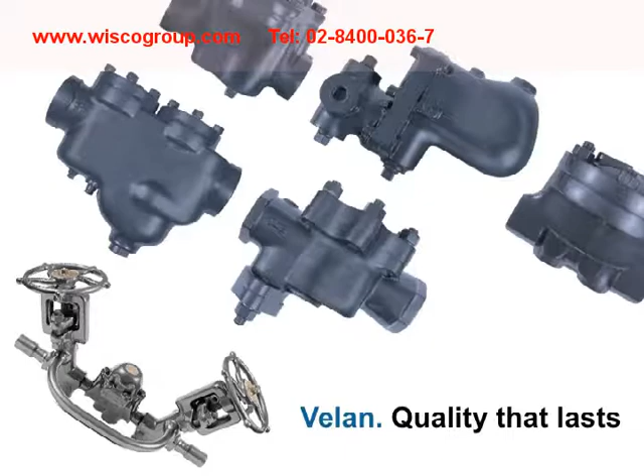Velan is a global manufacturer of industrial valves with over 1,800 employees and 13 manufacturing plants located in 9 countries around the world.

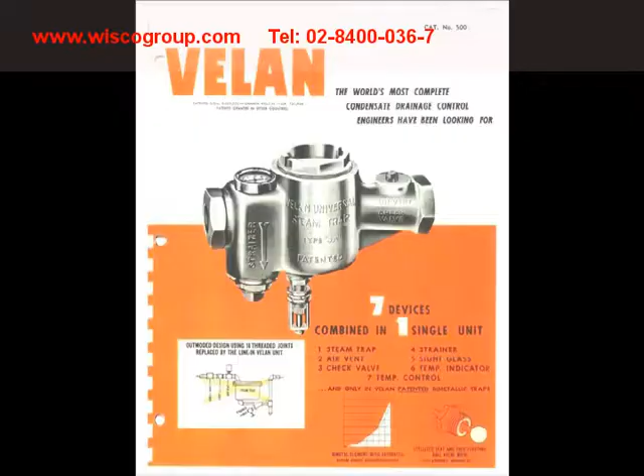The Velan Universal Steam Trap was introduced for the first time in Canada and the United States in January of 1950. In those days, the predominant steam trap technologies in use were cumbersome, inefficient, and required frequent maintenance.

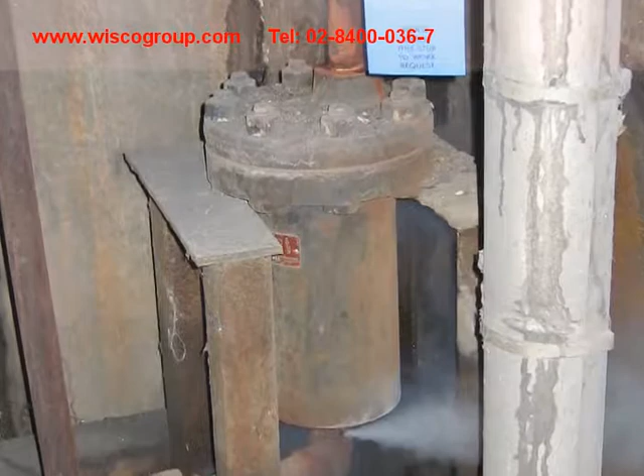Founder and CEO Mr. A.K. Velan set out to design a steam trap that was suitable for the high pressure and high temperature operating conditions

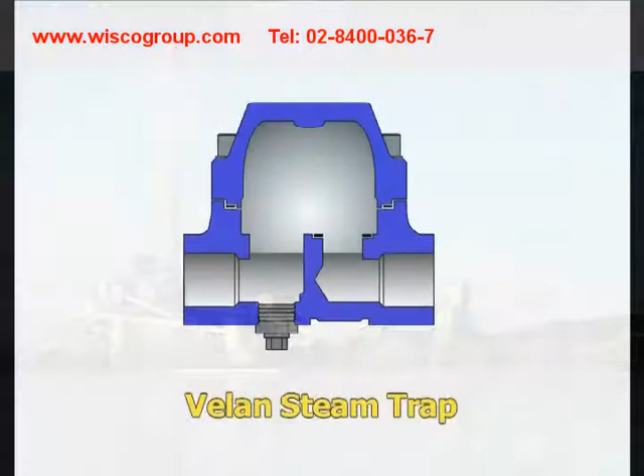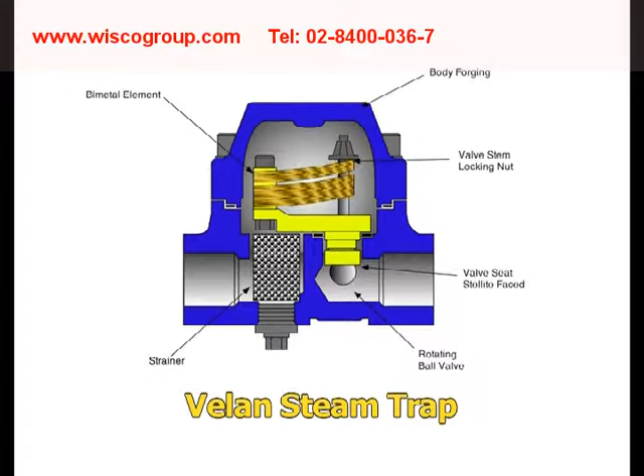that naval vessels and thermal power plants were being designed around at the time. The operation of this new steam trap was based upon the principle of a free-floating and rotating ball valve placed on the downstream side of a stellite valve seat, actuated by a multi-segment bimetallic element. The result is a steam trap that combines effective condensate drainage with high energy efficiency and long service life.

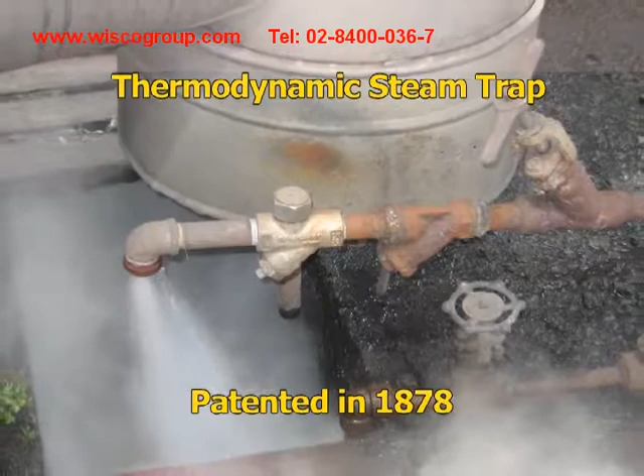The dominant steam trap technologies today are similar to those in use when Mr. Velan set out to change the world of steam traps in 1950. For example, the thermodynamic disc trap is the most popular design used across all industries today.

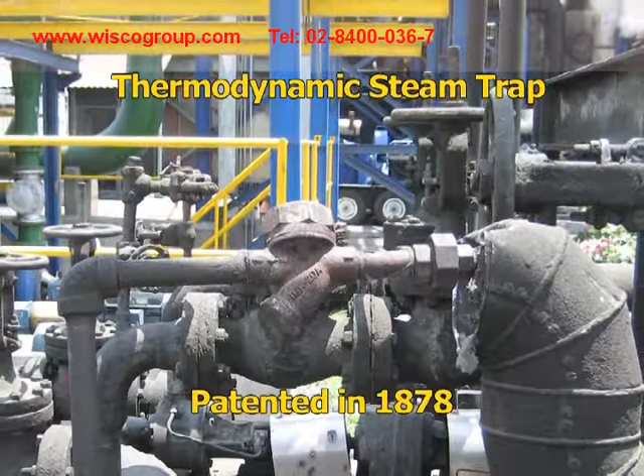First patented in 1878, the thermodynamic disc trap operates on the difference in flow velocity between a liquid and a gas. When liquid is being passed through the trap, the disc is pushed out of the way of the flow path, allowing free discharge of condensate. However, when steam or air enters the trap, the velocity of the flow increases and the disc is pulled toward the seat.

When the steam which is keeping the disc closed condenses, the trap opens and the cycle repeats itself.

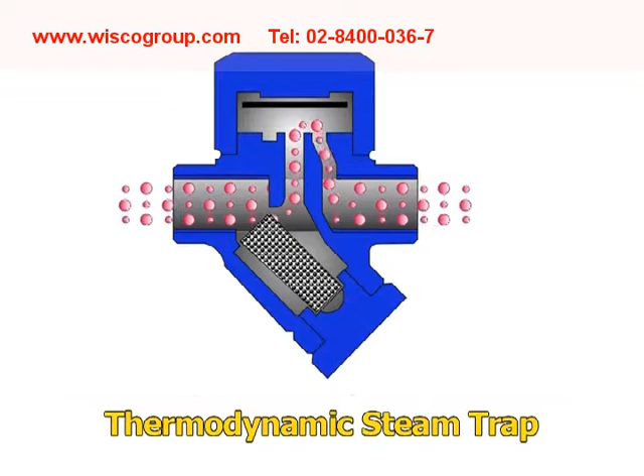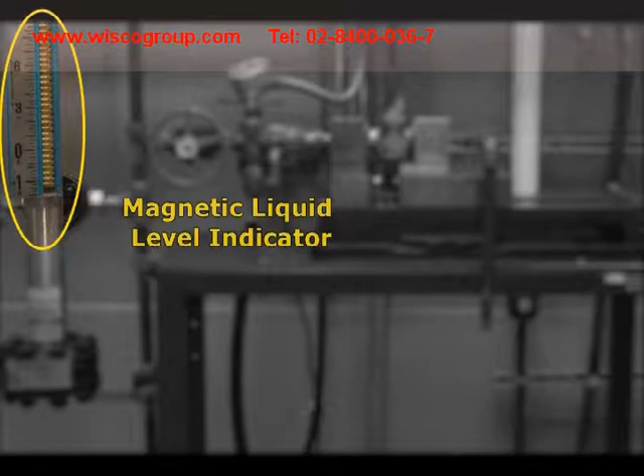For demonstration purposes, we have fitted a thermodynamic steam trap in our test rig to show its discharge characteristics. We have also fitted a magnetic liquid level indicator to show the level of condensate in front of the steam trap. Please note the operation when the condensate is completely purged from the line.

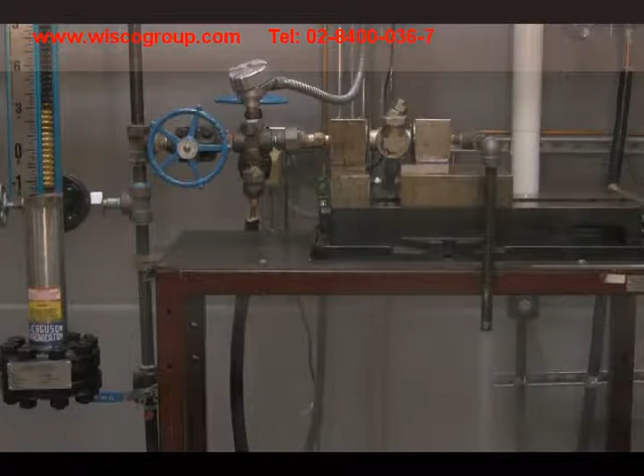The cycling action of the TD trap results in drainage of the condensate in the steam line. However, the violent blast discharge results in large amounts of steam being lost during each cycle, as high velocity steam flow is necessary to end the discharge cycle and close the trap.

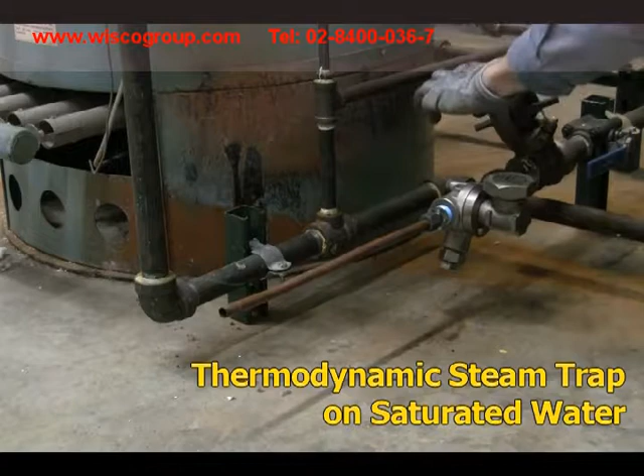Many manufacturers of thermodynamic steam traps claim that flashing condensate is responsible for ending the discharge cycle and closing the trap. However, as this flow test on boiler blowdown demonstrates, the TD trap will not close in the presence of saturated condensate. Only steam flow through the trap will end the discharge cycle and close the trap.

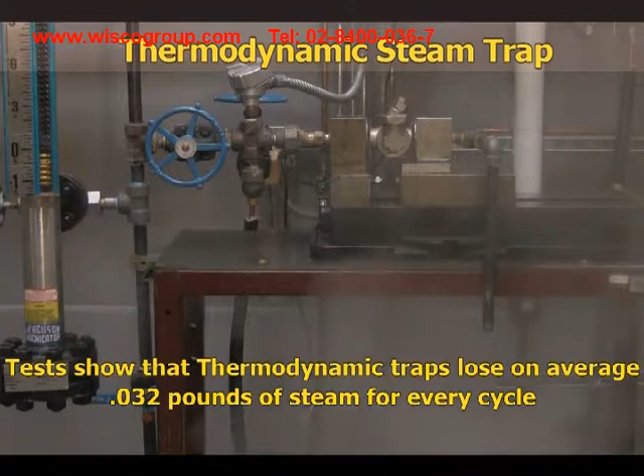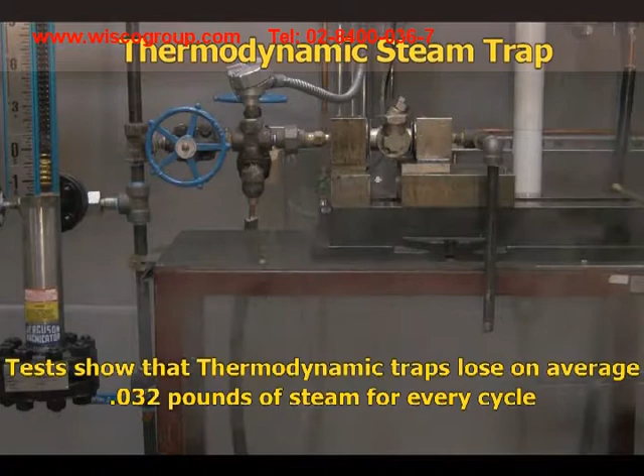Laboratory testing shows not only that steam loss is necessary for the TD trap to operate, but also allows us to measure the amount of steam loss during each cycle of the trap. The average steam loss required for a thermodynamic trap to function is over 0.03 of a pound of steam per cycle.

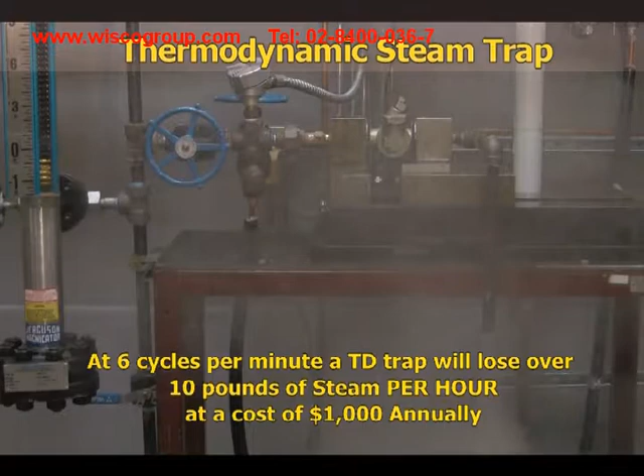At current energy costs and a cycle rate of 6 times per minute, the amount of steam required to operate a fully functional thermodynamic steam trap is in excess of $1,000 per year. The amount of steam loss necessary to operate a population of 1,000 thermodynamic steam traps is in excess of $1 million annually.

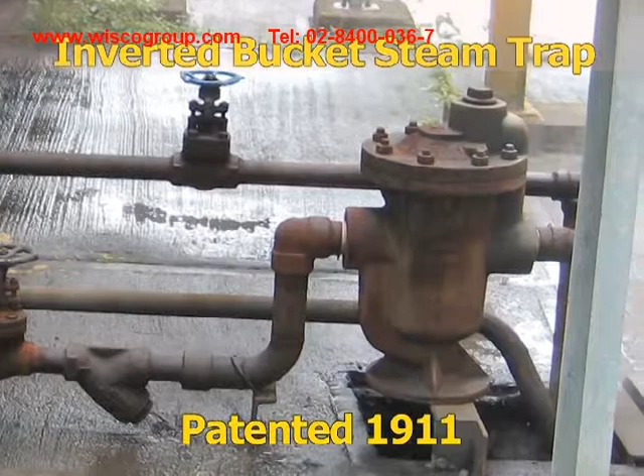The inverted bucket steam trap is widely used across all industries today. First patented in 1911, the inverted bucket trap operates on the difference in density between steam and condensate.

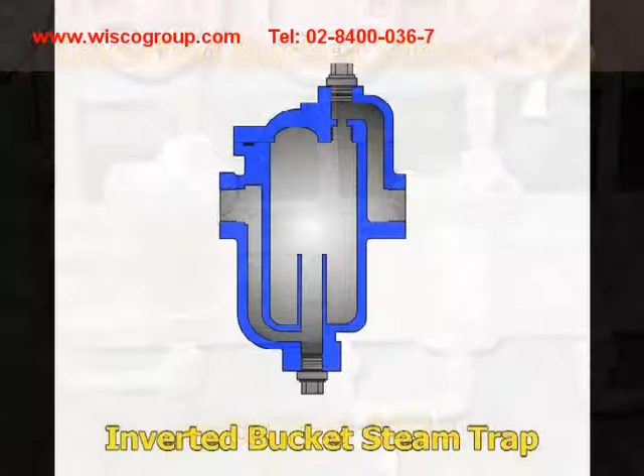This trap uses a bucket, open on the bottom, to operate a lever valve and orifice located in the top of the trap.

In the absence of steam, the bucket sinks to the bottom, keeping the valve in the open position and allowing for free discharge of condensate. When steam or air enters the trap, the bucket becomes buoyant and floats to the top, closing the valve. When this steam condenses, the bucket sinks to the bottom, opening the lever valve and discharging the condensate again.

During normal operation, steam is continually lost through the air vent in the top of the bucket and periodically discharged through the valve as the bucket loses buoyancy.

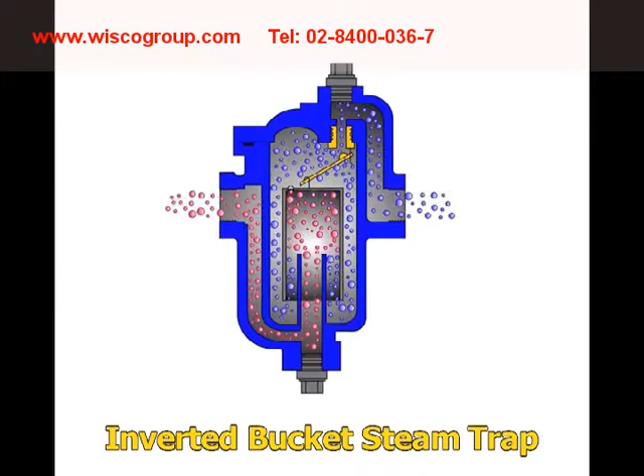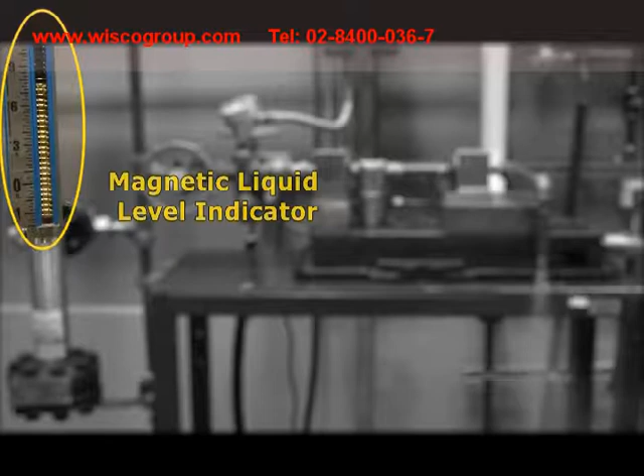For demonstration purposes, we have fitted an inverted bucket steam trap in our test rig to show its discharge characteristics. We have also fitted a magnetic liquid level indicator to show the level of condensate in front of the steam trap. Please note the operation when the condensate is completely purged from the line.

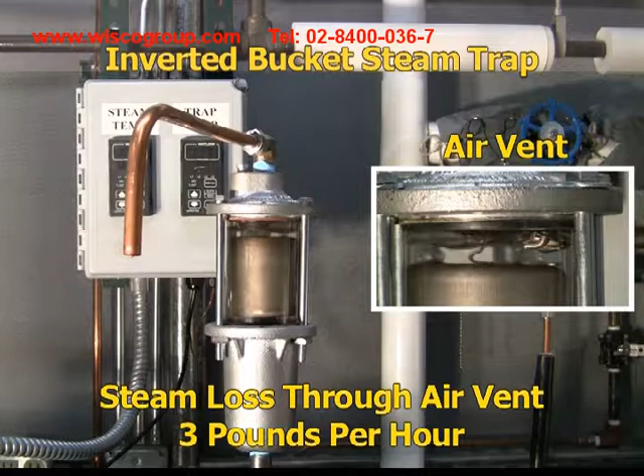Testing shows loss through the air vent to be approximately 3 pounds of steam per hour. This steam loss occurs throughout the entire life of the trap.

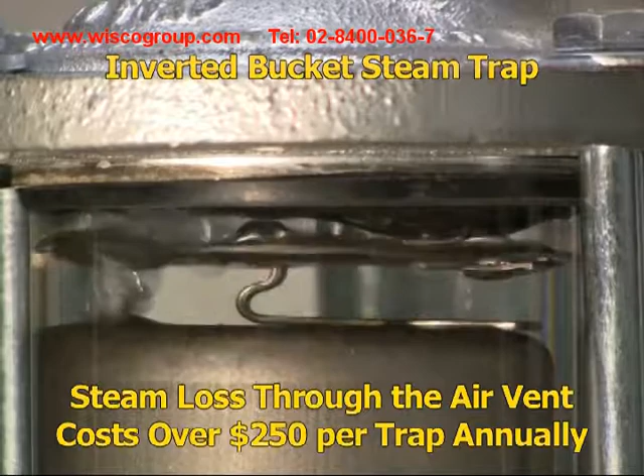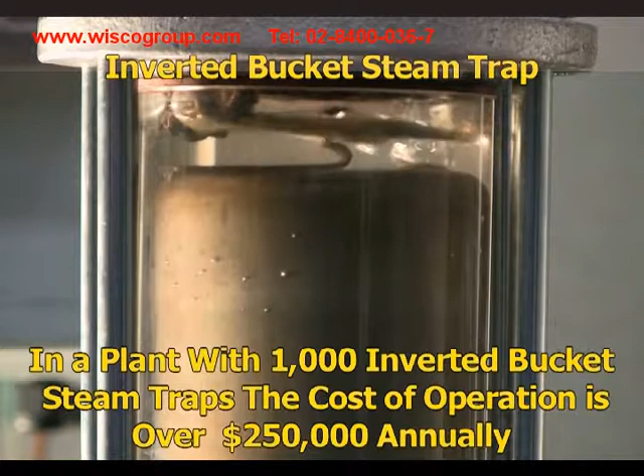At current energy costs, the amount of energy lost due to the operation of the air vent is over $250 per trap annually. In a plant with a population of 1,000 inverted bucket steam traps, the amount of energy lost due to the operation of the air vent is over $250,000 annually.

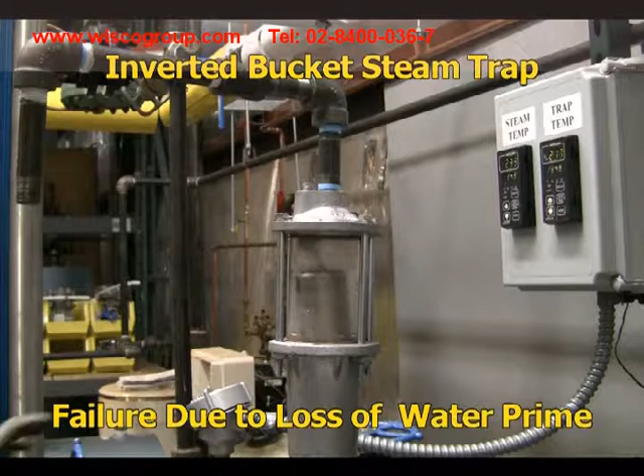The most common cause of failure for an inverted bucket steam trap is loss of water prime. As this demonstration shows, if the water prime is lost from the inside of the trap body, the high velocity flow through the trap prevents it from repriming. Loss of prime can be caused by exposure to superheat, improper sizing, mechanical wear, or simply too rapid a startup.

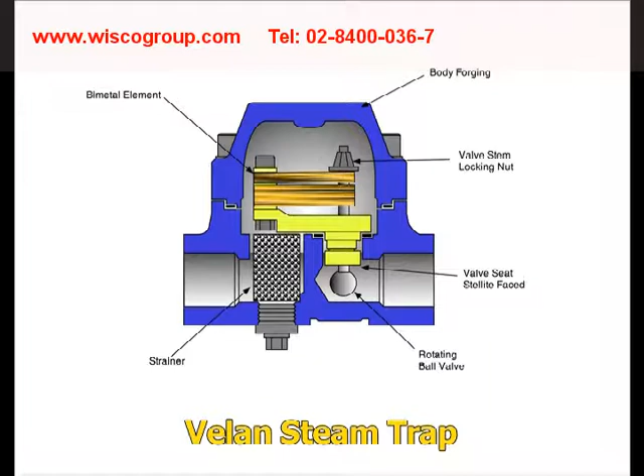The Velan steam trap offers an efficient alternative to conventional steam trap designs. Operating on a thermostatic principle, the Velan steam trap requires no more energy to function than is present in the condensate that collects at the drain point.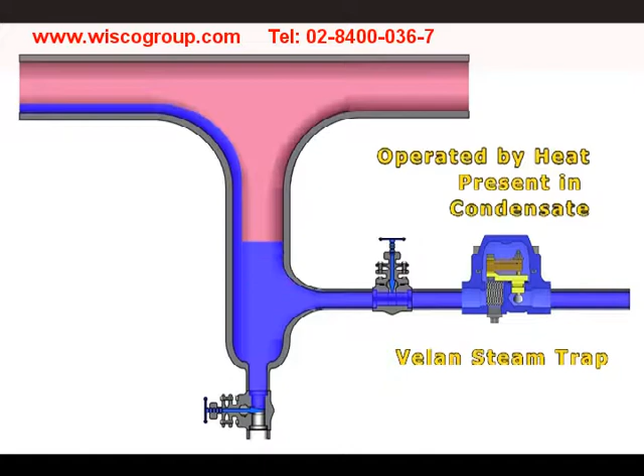At ambient temperatures, the bimetal element is relaxed and the valve is open wide, allowing for rapid discharge of cold condensate and non-condensable gases at startup. As the temperature of the condensate increases, the bimetal element pulls the valve closed.

In the presence of live steam, the valve remains closed tightly. When condensate in the line cools slightly, the line pressure overcomes the closing force of the bimetals, and condensate discharge resumes.

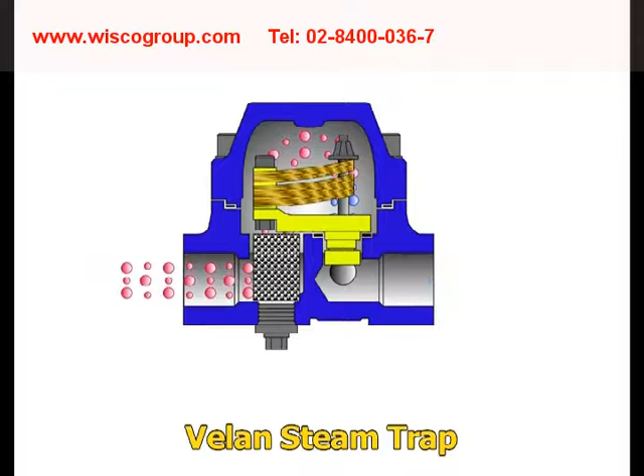In the event of a sudden drop in upstream pressure, the valve and seat arrangement acts as a check valve, preventing reverse flow in the system.

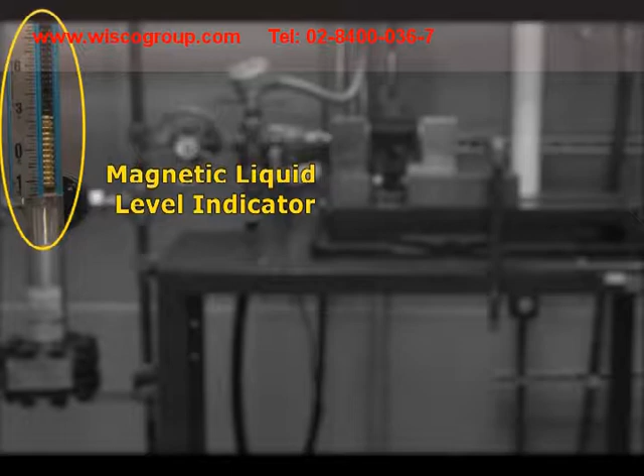For demonstration purposes, we have fitted a Velan thermostatic steam trap in our test rig to show its discharge characteristics. We have also fitted a magnetic liquid level indicator to show the level of condensate in front of the steam trap. Please note the operation when the condensate is completely purged from the line.

The Velan steam trap provides rapid, efficient startup of steam drip leg and tracing systems.

Due to the advanced design of the bimetallic element, the Velan steam trap maintains no more than 18 inches of condensate ahead of the trap at any time, ensuring efficient drainage and preventing the loss of live steam.

Compare the discharge of the Velan steam trap with the thermodynamic disc trap below.

The Velan steam trap will save over $1,000 annually over that of a thermodynamic disc trap. In a plant with a population of 1,000 steam traps, this is a savings of over $1 million annually.

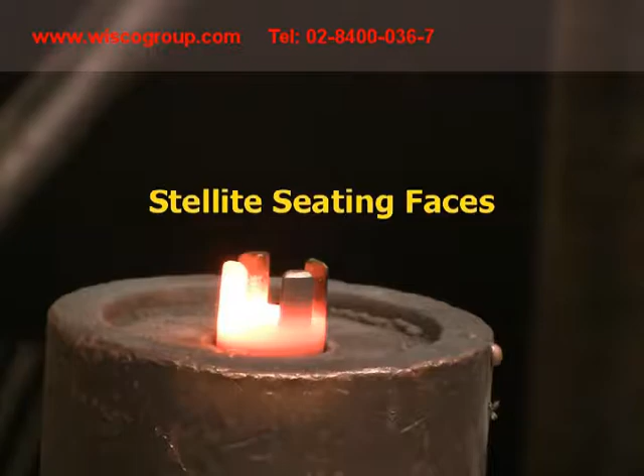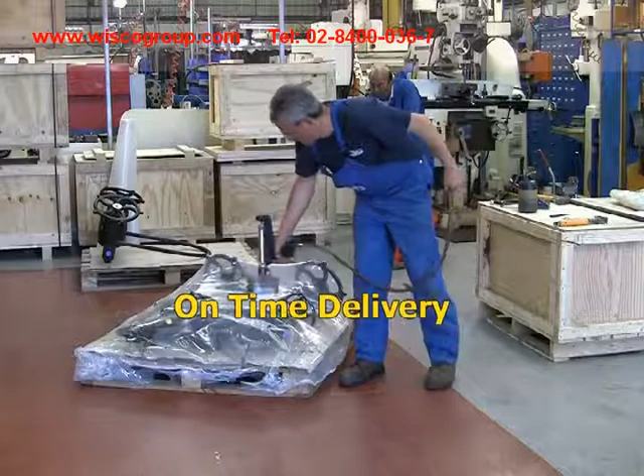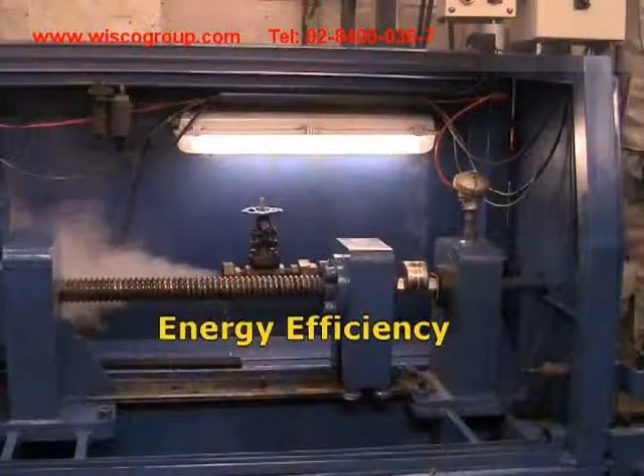Velan steam traps are manufactured in compliance with all major international quality standards, using the most durable materials available today. Dedication to continuous product improvement and on-time delivery make Velan a worldwide leader in the design and manufacture of steam traps. For over 60 years, Velan has been the steam trap of choice when durability, rugged construction, energy efficiency, and critical drainage requirements are needed.